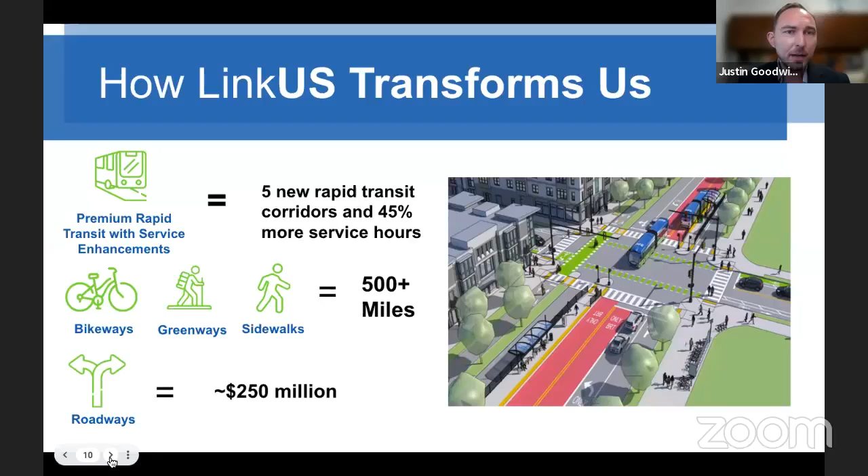Corridors are expected to operate on 15-minute or better intervals and run on clean energy. They'll operate similar to light rail, but can be built quicker and at a fraction of the cost. We anticipate completion of these 3 initial corridors by the end of 2030. That is ultimately dependent on pursuing a regional funding strategy, including eventually a transit sales tax initiative that will allow us to secure federal funding as a local match.

The corridors in green are identified in COTA's NextGen plan, but have not yet been finalized to the same level of specificity as those in blue. Next, I'll give a quick overview on the update of each of the corridors that are in design.

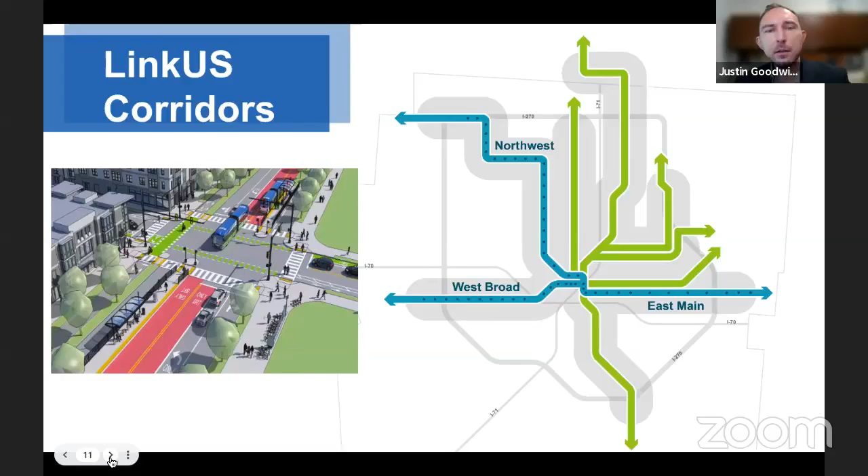The West Broad Street corridor is nearly 9 miles long, beginning at the Prairie Township Community Center on the far west side and heading into downtown Columbus. The dashed green line on this map shows where we anticipate the BRT operating in mixed traffic, whereas the solid green line is where we expect it to operate in its own dedicated transit lanes. Again, that's all in the design process now.

We do expect the Federal Transit Administration, the FTA, to secure capital investments grants funding as a federal funding match in the near future as part of the implementation strategy. We're approaching 30% design completion and will proceed into the 60% design process in 2023.

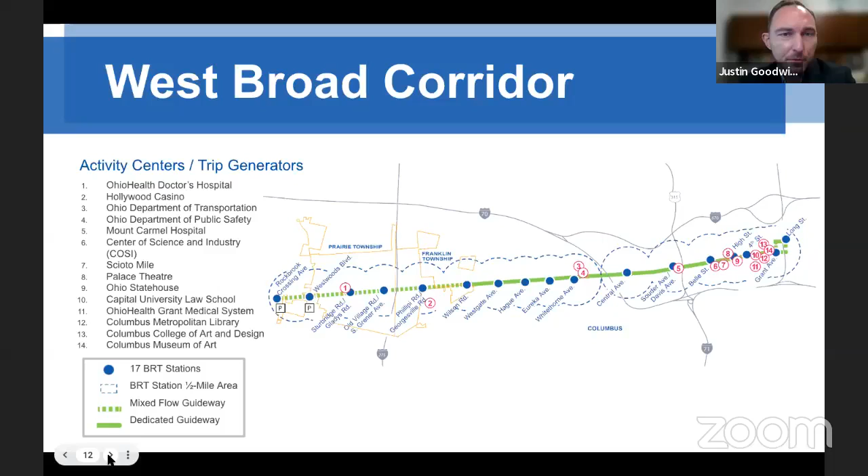The next corridor, the East Main Street corridor, is 13 miles long, beginning at the Eastwood development in Reynoldsburg on the far east side and heading west through Whitehall, Bexley, and into downtown Columbus, then integrating with the West Broad Street corridor and other corridors in downtown.

There are multiple concurrent planning efforts underway within downtown Columbus that require an extensive amount of coordination between the city, COTA, and downtown stakeholders. There will be a downtown multimodal transportation study kicking off in early 2023 to ensure we're taking a holistic approach to all of these mobility investments in downtown.

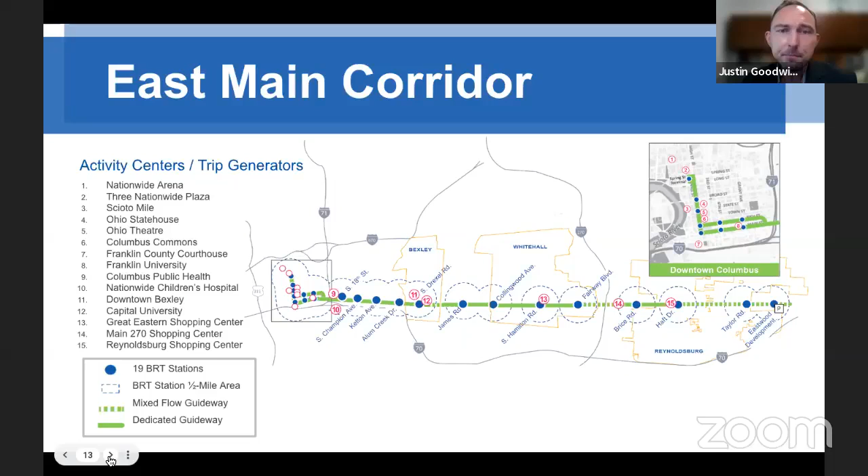We anticipate having 30% design completion for East Main in the first quarter of 2023, and then similarly proceeding through full design moving through the rest of the year. This project has already also been accepted into the FTA's Capital Investments Grants Program.

Lastly, the Northwest Corridor connects 5 of our region's largest sports and entertainment venues and 3 of the largest employment hubs within Franklin County, representing 30% of all jobs in Franklin County. It's expected to continue to grow in population by 50% by 2040.

This project will be implemented, we expect, in 3 phases. The first phase moves from downtown west along Spring Street and connects to Olentangy River Road up to Bethel Road. Future phases will extend from Bethel Road over to Sawmill Road and then ultimately to 161 at the Bridge Park development in Dublin, and then eventually all the way to the Ohio University campus area in West Dublin.

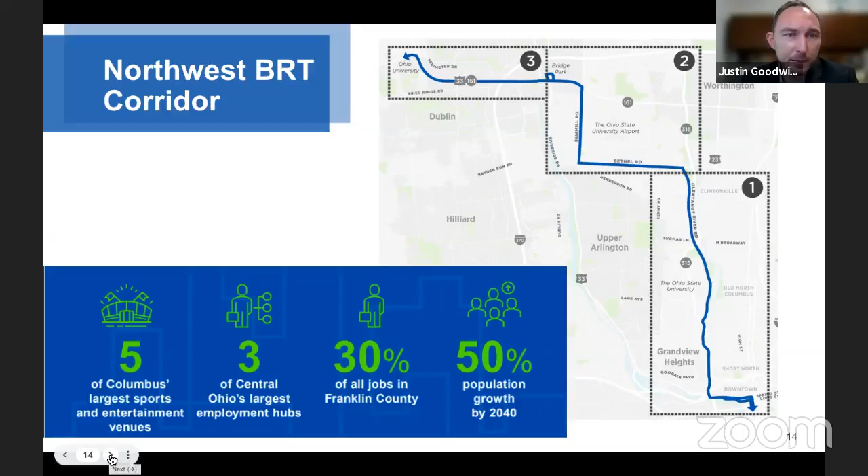The COTA board just a few weeks ago adopted this alignment shown on the slide as the locally preferred alternative for the Northwest Corridor. That's the first step in the process to move into the FTA Capital Investments Grants funding program. We anticipate that next step into the CIG program in 2023.

Next, Ray Gaida with COTA will outline the community engagement process that we've followed as we've moved through the corridor station design process.

Awesome, thank you so much, Justin. As Justin said, my name is Ray Gaida. I'm the marketing manager over at COTA, and was part of the team doing a lot of engagement last year. So I'm really excited to share some of the results that we had from those sessions over the last year.

We did 6 community-inspired design sessions from April through June. We were at a lot of the different Columbus Metropolitan Libraries. We were all over both of the corridors, East Main and West Broad, to really make sure we were tapping into all aspects of the community. You can see some of the locations that we were at throughout that time period.

So this is just a quick image to show what it looked like during those engagement sessions.

The first thing we really wanted to focus on was educating. For example, the presentation that Justin gave today, we wanted to make sure everyone was fully aware of the purpose of LinkUS, as well as how the engineers and design team were set up with the task of designing these stations, getting everybody fully on board to contribute in a really impactful way.

We talked about dreams and challenges. We really got clear with everyone on what they wanted to see, what they felt their community really needed, and took a lot of those things into play. We also did some exercises to inspire each community to understand its own uniqueness, so we could contribute that to the design as well.

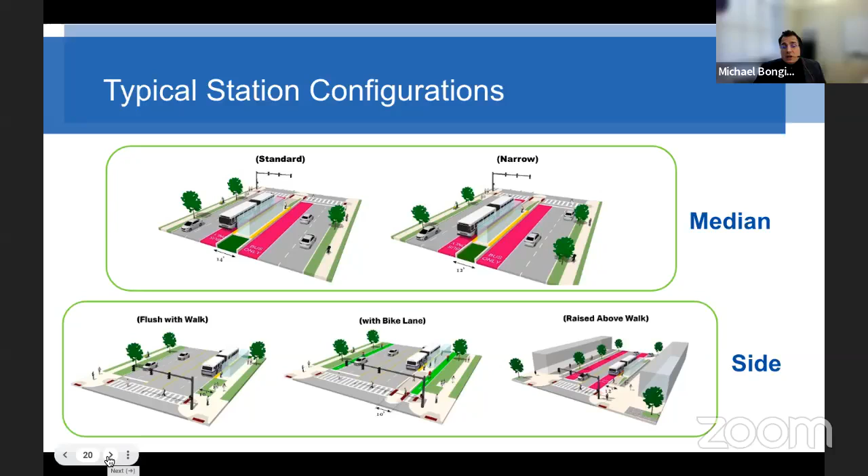So as we go through these, I'm going to show you those two major types. Next slide, please.

The technical part of the concept design process is where we really work closely with COTA and LinkUS in an iterative and inclusive process. A big part of that is, early on, as a result of the community outreach engagement we did and the workshops we've had with our client, we established a set of design principles from which we would then design our building, or our stations.

So in the six of those are the usability of them, operability, how it functions, the simplicity of it. Really, if you want a long-term solution that doesn't become an operational nightmare, you need to think about approaching it simply, really thinking about weaving the community into the process, and then looking at and talking about identity. Yes, this is a COTA and LinkUS brand, but it also has to fit within the community, and what impression does that give you?

And then finally, resiliency and sustainability. How does this station reduce carbon footprint and contribute over time?

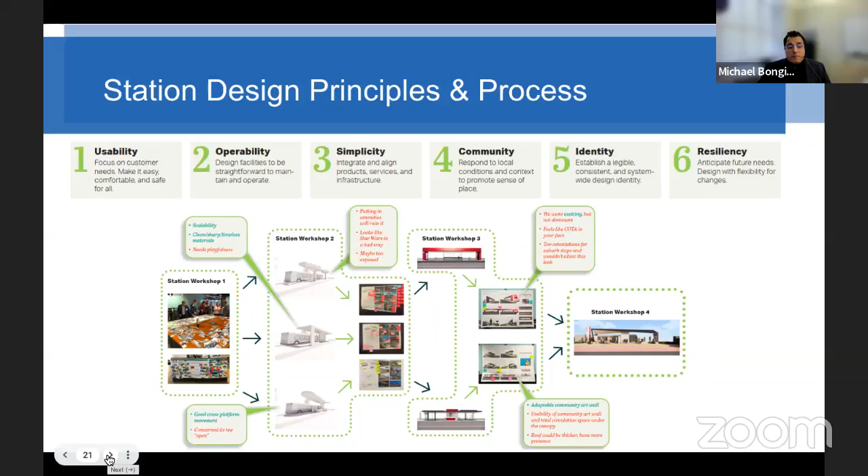So we studied a number of options, a number of variations, and you can see here at the bottom of the screen what that process looked like. We went from many to few, and we whittled it down to the concept that Matt and I are about to share. What we really hope is that what we came up with was the best of all the ideas, and really a station design that's not like one we've seen before in the country.

We're kind of calling it the dynamic frame. The reason this is exciting is this particular design solution accomplishes many things with one simple idea. So while it's simple, it's also dynamic. It's visually open, but also protected from the elements, and that openness contributes to the feelings of safety. It's innovatively cost effective - I'll talk a little bit about that. It's meant to fit in anywhere while also being able to represent the community. The beautiful thing is that the form itself is driven by performance and function, not aesthetics. But in the end, we ended up with an aesthetically beautiful and unique design, which is really kind of like the textbook definition of what it means to innovate.

So what's really awesome about the approach is the simplicity of it. We really took a kit of parts approach, using a single material - a smooth precast concrete that will make it simple to build but also super durable. It's going to be easier to construct and install because it can essentially be assembled off-site and brought in like a piece of furniture and set down on its foundations. There are fewer systems that will be part of this, meaning less maintenance and less wear and tear over time, and the fewer materials there are in any system like this, the better the performance.

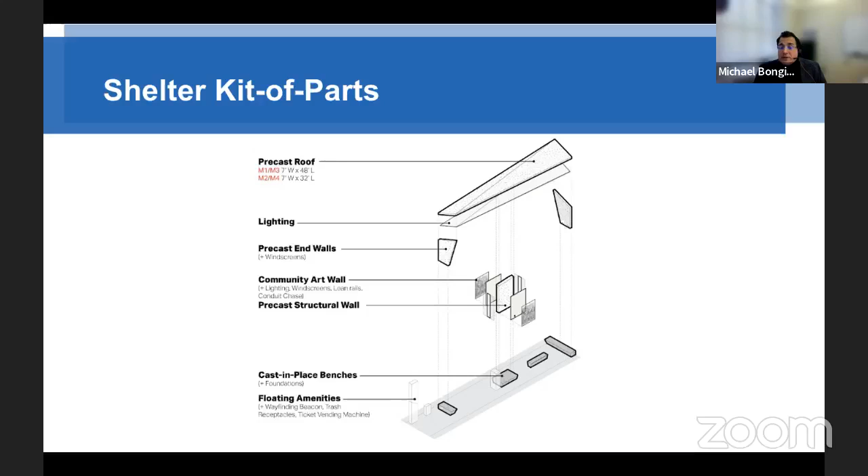One of the things I want to point out while we're looking at the overview is that the way this roof is sloped, on one side there'll be a channel that will take the water down to the right-hand side into a planted basin. On the left-hand side, that sloped roof will have a channel and take it down to a bit of a trench, which will take it into the planted basin. We're going to handle all the stormwater essentially on site - we're not going to contribute it to the sewage system.

So in terms of safety as well as identity, one of our approaches is to have these stations be well illuminated. We're creating a luminous ceiling panel, a continuous glowing panel of light that will keep the entire platform evenly illuminated all night long. Then there'll be additional street lighting adjacent to it, and a totem sign, which is an icon sign with the station name on it and an interactive map. Matt will get into the detail of that in a bit.

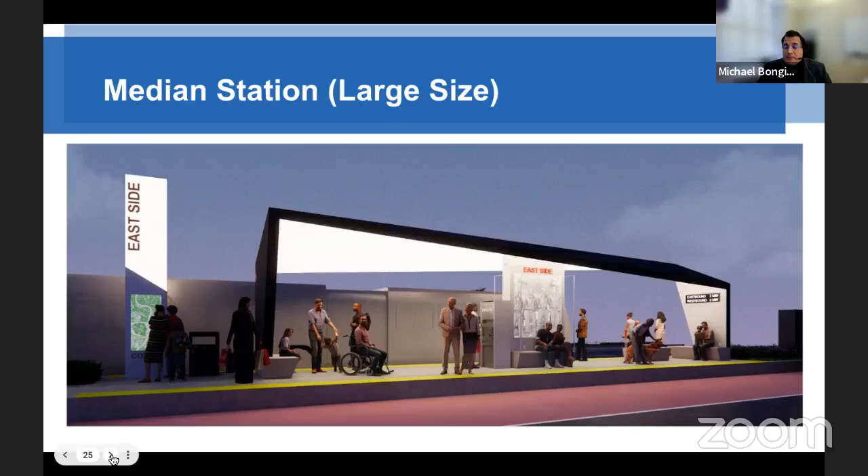You can see some of that community art integrated into that center panel, along with the naming of the stations. There'll be naming on the end panels of the precast walls, and real-time arrival signage located on the inside face of those panels. The seating itself is actually the foundation of the structure above, so it's doing double duty, holding up the structure but also providing the seating. On the ends you can see a set of seats, and there's some in the middle as well. There'll also be glass panels to help reduce some of the impact of the wind.

This gives you another impression of what it looks like and feels like at night.

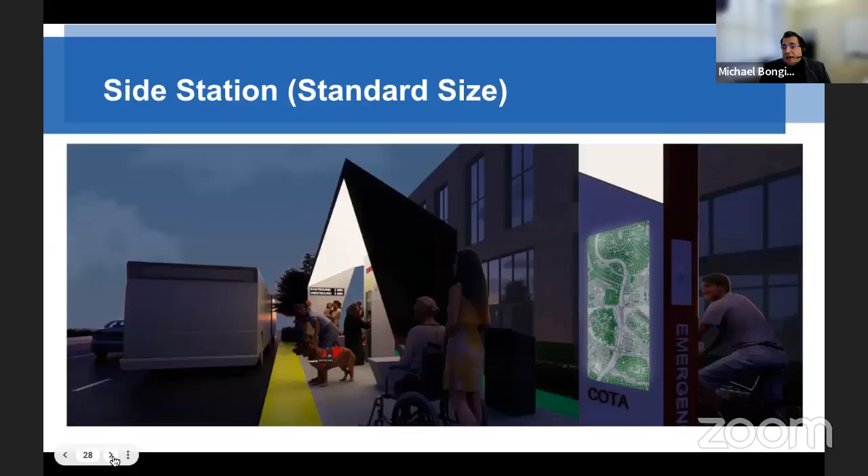And then Matt is going to talk a little bit more about the furnishings and the other amenities going into the station itself. Matt? Thanks so much, Michael, I appreciate that.

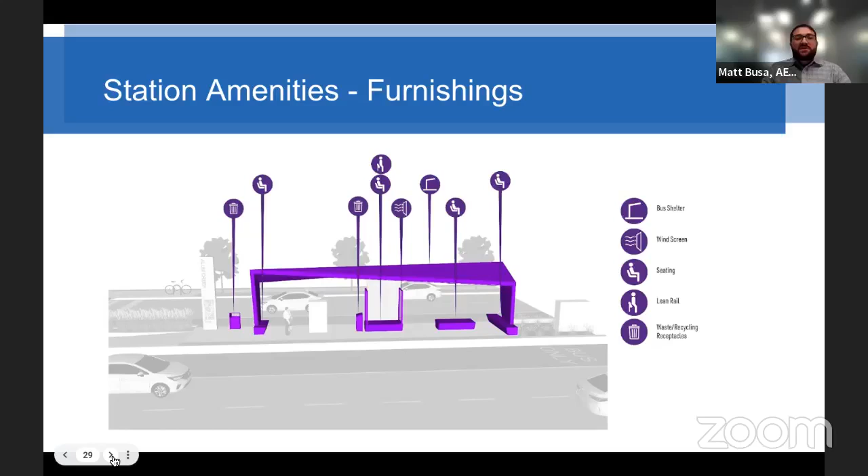My name is Matt Busa, I'm a landscape architect with AECOM, and I've been working on the station design team along with Michael. As mentioned previously, there was an extensive amount of public and stakeholder engagement that went into these designs, and as Justin mentioned, these are really envisioned to be premium station platforms. So in the next few slides, I'm going to take you through a series of images that shows the array of amenities currently planned for these stations.

This first slide shows the site furnishings. The shelter roof, end walls, and windscreens provide protection from the weather. These platforms are also envisioned to include benches, lean rails, and trash and recycling receptacles, just to create a place of comfort as people wait for the bus.

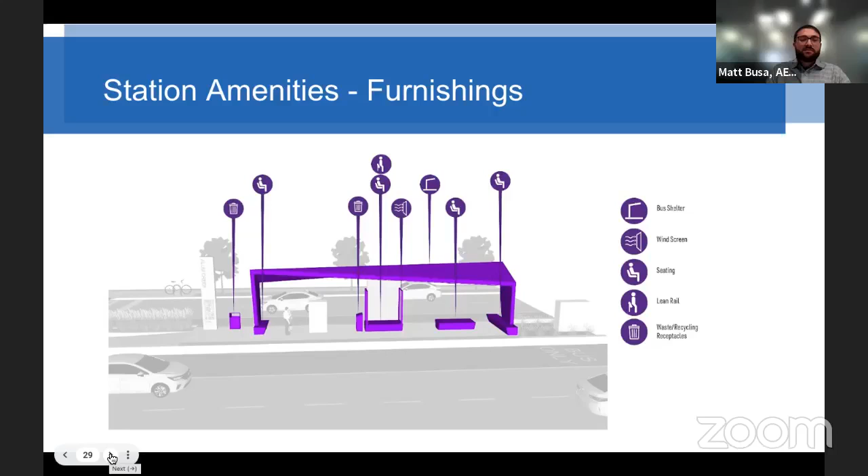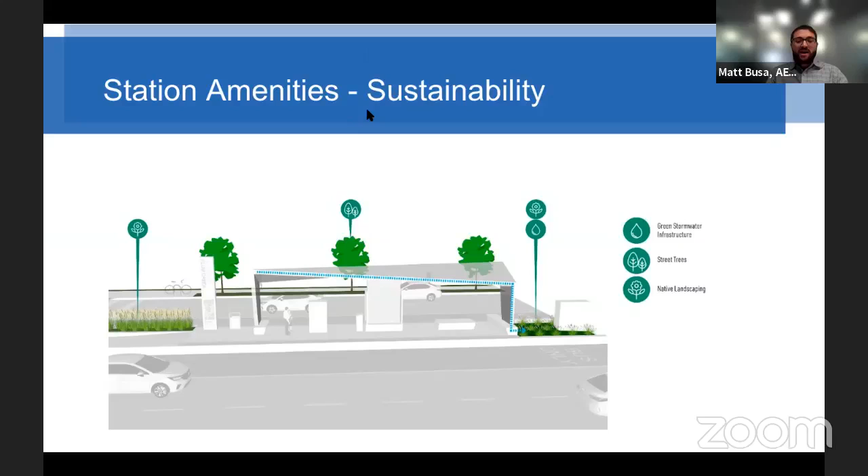We really heard from the community and stakeholders that sustainability was an important goal in this project. So the stations will include several sustainability features, including the green stormwater infrastructure that Michael mentioned, shown in this diagram. It will also include things like street trees and native landscaping that will enhance the urban tree canopy coverage, provide shade, trap carbon, absorb stormwater, and create habitat for pollinators, birds, and other species.

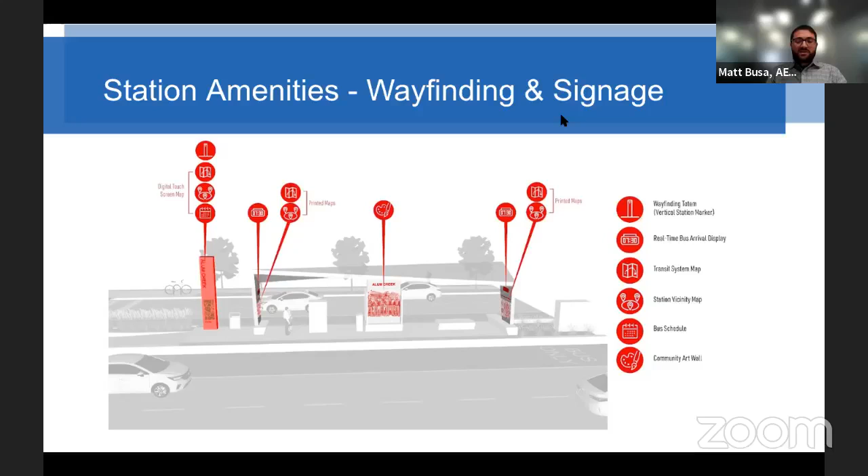This slide shows wayfinding and signage elements. Wayfinding and signage will help make the stations easy to find and the transit system simple to navigate. The vertical station marker that Michael mentioned is envisioned to include the station name, as well as a digital touchscreen panel that could include information like a station map or transit announcements. Inside the shelter, digital real-time bus arrival displays will let riders know how long until the next bus arrives. The center wall will include space for a community art graphic.

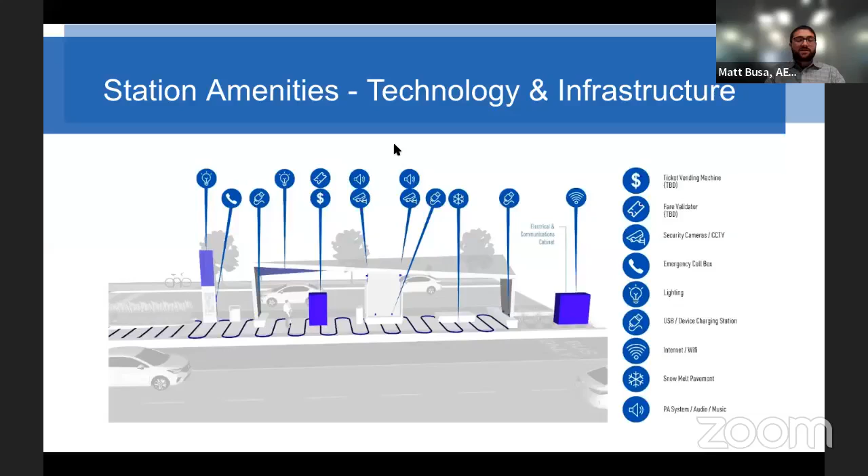We have a series of images here that show the stations in context. The design really extends well beyond the station platform. Each station will be placed in a unique neighborhood context, and it's critically important that these stations are designed with context sensitivity. Having safe intersection crossings, comfortable sidewalks, street trees, landscaping, and lighting all contribute to vibrant and thriving neighborhoods.

LinkUS will help transform these corridors from car-oriented roads to complete streets that serve multiple modes of transportation, including safe sidewalks, bike lanes, dedicated transit lanes, and general traffic lanes. Next slide, please.

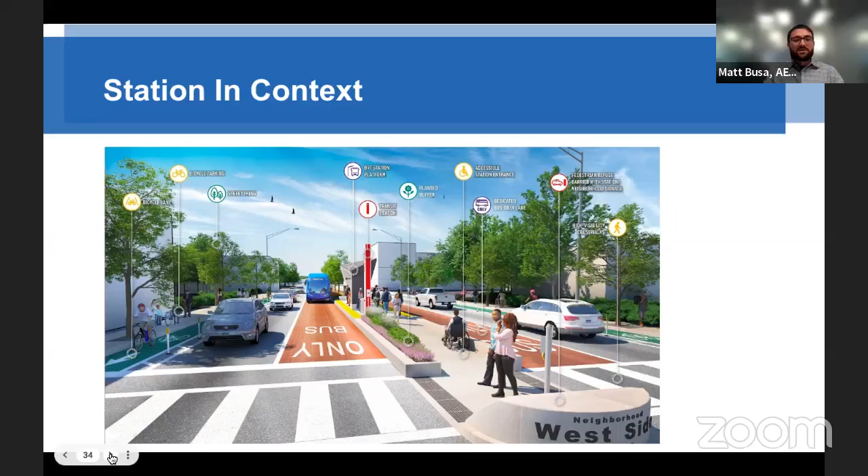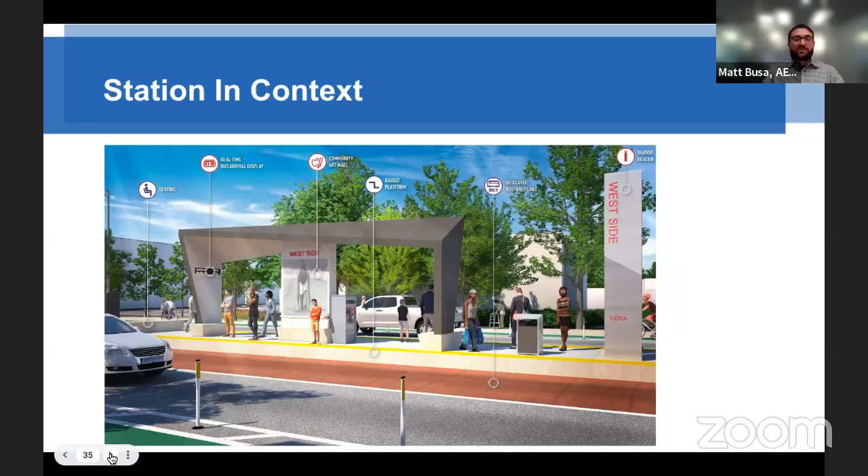Next slide, please. So I'm going to take a step off of the station platform now and talk a little bit about micromobility. LinkUS recognizes that each trip on a transit vehicle begins and ends on another mode of transportation. The stations are designed to give people options for safe ways of how to get to and from those stations. One of those options is micromobility.

This term refers to low-speed devices such as bicycles and scooters, e-bikes, and then kind of less common devices like segways, skateboards, and a wide variety of others. You can go to the next slide.

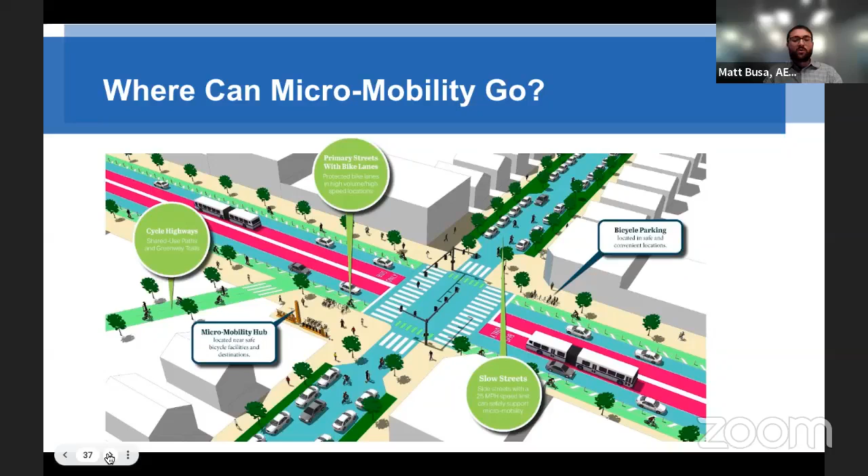These devices are not safe in every environment. They can be safely used on cycle highways, on routes like shared use paths and trails. They can also be used safely on primary streets with protected bike lanes or slow speed local streets. Next slide, please.

So we have developed 2 prototypes for micromobility hubs. An amenity that would be located near the transit station, but not on the platform. So this would be on the sidewalk side. The micromobility hubs would include things like bike racks, e-bike charging stations, possibly bike share stations, scooter corrals, bike repair stations, and some wayfinding and map element.

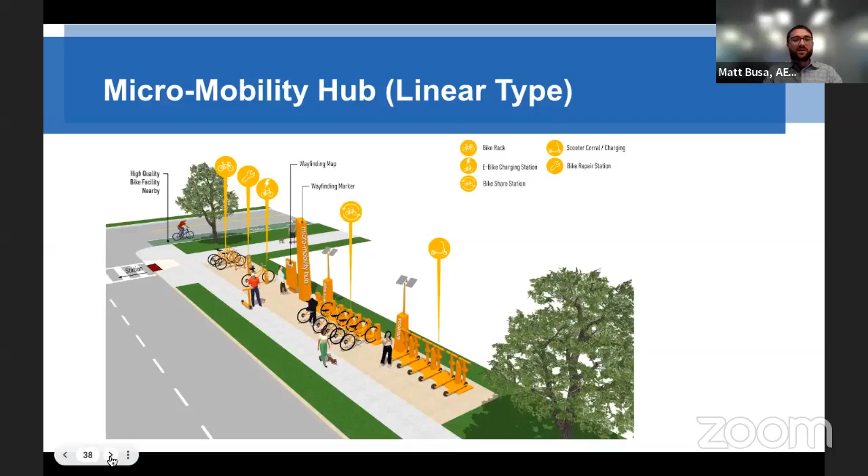So as I mentioned, there's kind of 2 prototypes. This one is a linear type that would be located kind of adjacent to the sidewalk. The next slide shows a second prototype for a plaza type micromobility hub that would adapt to a different context. It would include the same elements, but fit better into a public park, open plaza, or vacant lot.

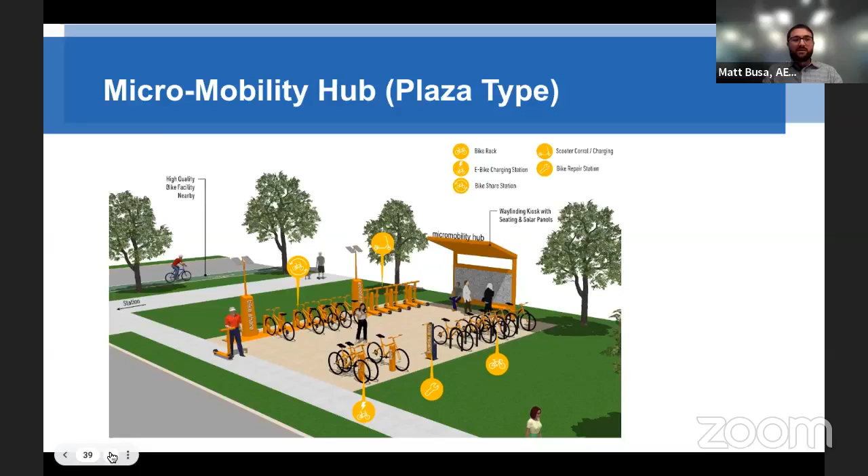It should be noted that not every single station is envisioned to receive a micromobility hub. COTA plans to focus these hubs in high density areas with access to high quality bike facilities and trails where people can safely ride them. So with that, I'm going to hand it back over to Donna.

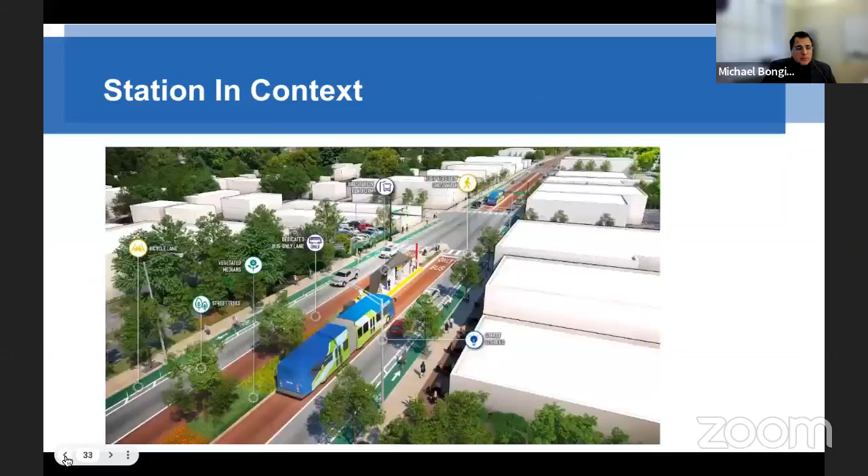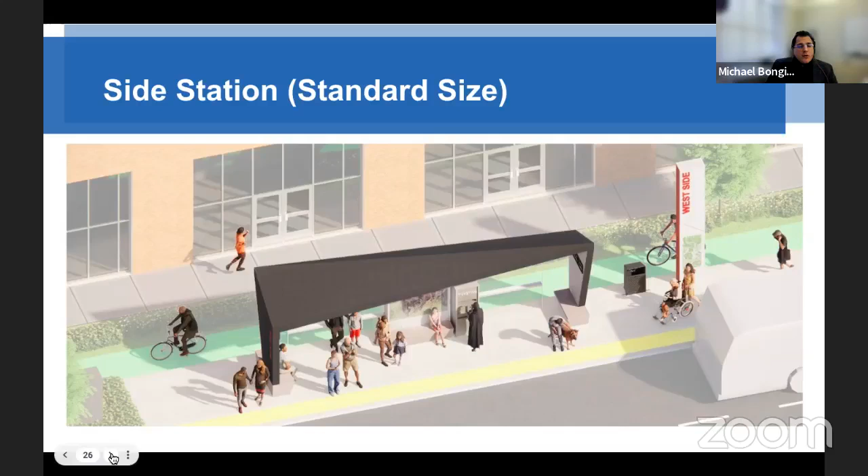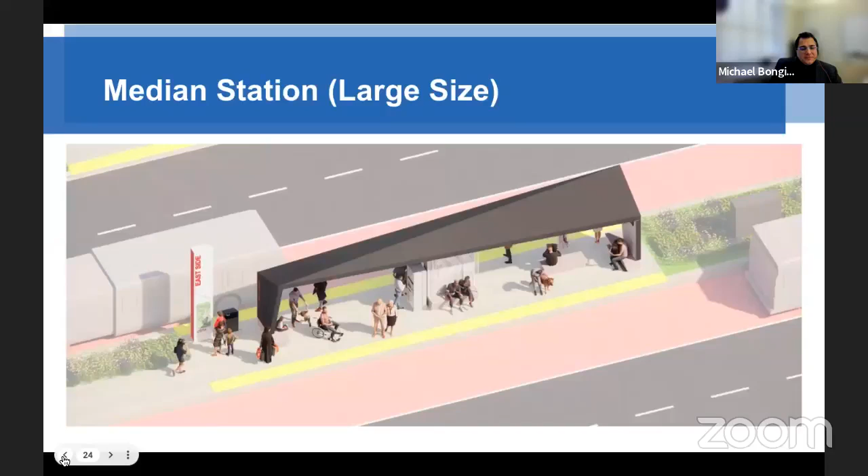Let me think about this, let me take a look here real quick. Go back to like an overall... many good ones, keep going. Oh, that's fine, this one. Actually, back a couple more. Keep going, no, the other way. Back, meaning to the beginning. Yes, keep going. One more.

Okay, yeah, so the ends of those - obviously that roof is parallel to the direction of the buses, so it's a flat kind of plane, but we have to hold it back a bit.

In terms of other protections, there are the two end walls. When you think about these structures, they're going to be in different parts of the city and different orientations in all those different parts of the city. So unless you create a full enclosure, which isn't really feasible with this overall design approach, you have to rely on some internal walls and some exterior walls.

You can see that the seating is located up against the inside of the end walls. And if you look at the center panel where the community art is located, those panels themselves on either side of it, you can sit on those for protection. The end walls of that central panel in the center will have glass on it as well, so you'll have some protection from the other direction.

But the goal here was to create as much open, movable, free area as possible, and that was our approach to addressing protection from the wind and rain. You're never going to have a perfect condition unless you have a completely enclosed structure where door openings would line up with the door openings of the bus - and then you'd have a safety issue, because people would be tempted to walk between that glass panel and the end of the platform. That was a serious safety concern for putting glass that close to the bus.

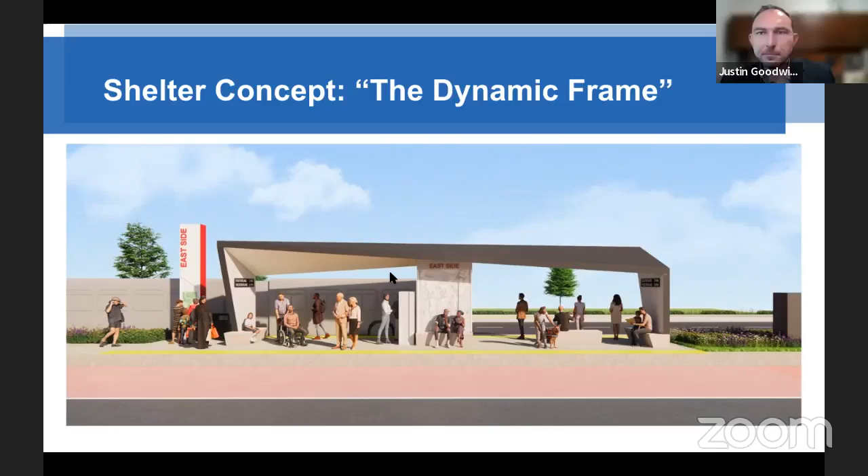Thank you. I think we have time for one more question, which is on cost - is there an estimate of anticipated costs per shelter?

I can start that, and I can turn over to Julia if she has any more information to add. Each of these corridor projects are multi-million-dollar projects with a pretty significant investment - more than what we've ever done in terms of a transit investment in Central Ohio before. The CMAX project that COTA rolled out in 2018 was a $50 million project, and these projects will be many more times than that.

Right now we're working through our capital cost estimates within the FTA's grant program and working with them, adding in appropriate measures for inflation and year of expenditure. Those are things we're currently refining and adjusting as we go along. I don't have a specific number to share right now, but I will direct you to our resources page on our LinkUS website, which has a lot of previous project information and a lot of details on different capital costs on each of these corridors.

Hey Zach, this is Julia. I just wanted to add in and basically reaffirm everything you just said.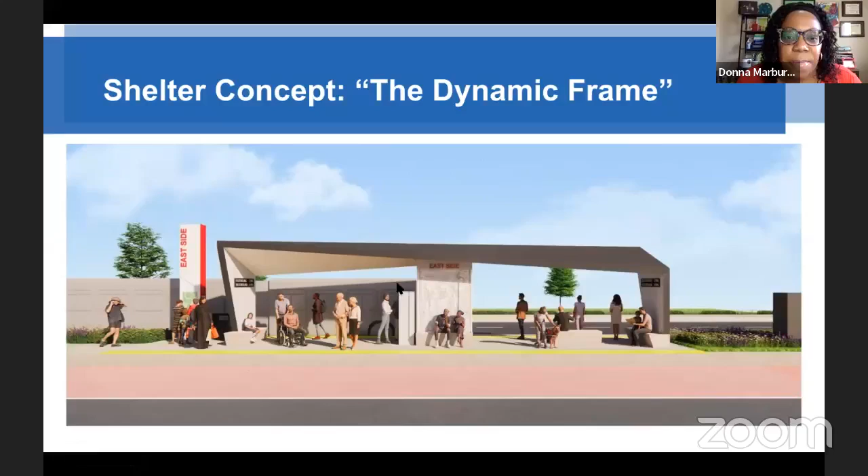Moving forward, we are at the end of our engagement for today. I do want to thank you and just go over some next steps.

Like I mentioned earlier, the station design images you've seen today will be available on the LinkUsColumbus.com website at the end of this meeting, so feel free to head on over there. We'll also be communicating with you via email to remind you to take a look at those images and share them with your neighbors and friends as we're collecting feedback on these station concepts, as well as sign up for the newsletter while you're on the website.

We've got a lot of exciting things happening in 2023. Zach, do you want to go over the upcoming status of all of our corridor projects? Yeah, I don't think you're sharing the screen right now. Oh, okay, let me.